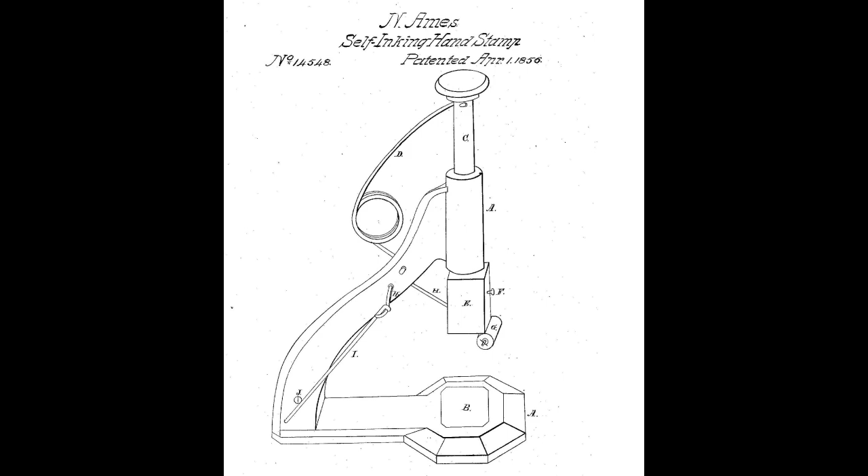First is self-inking stamps. In the 1850s these were first made, but they were large desktop machines, a bit like large perforators. They had a base and a large lever or plunger, and you'd have to pull a lever to stamp the paper. The reason for this is that the ink that was used was not very good, and it had to be rolled onto the typing surface.

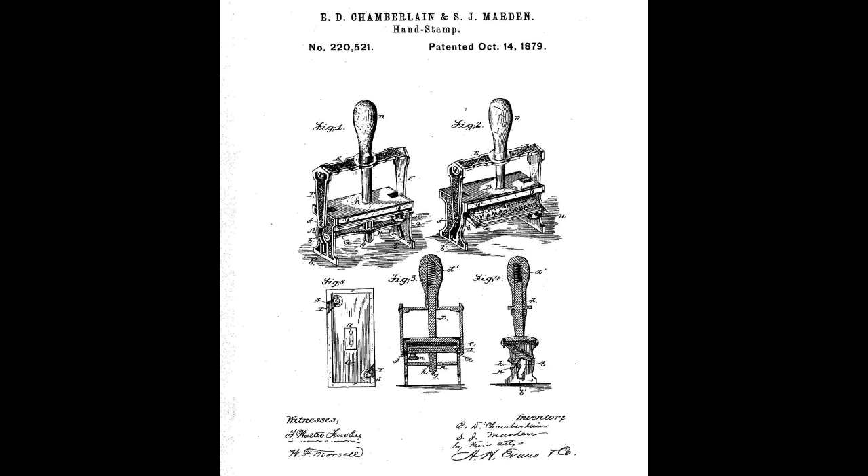Once ink was developed further and more quick drying, they could use small stamping cushions inside the machine itself. That happened in the 1870s roughly.

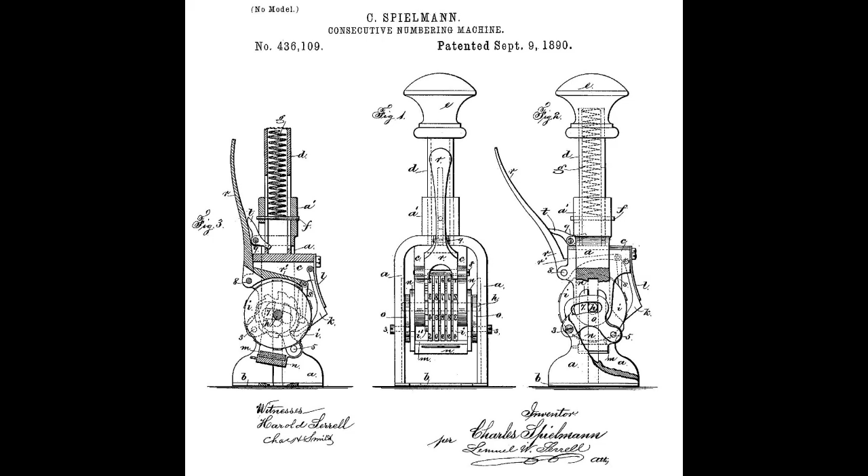The second major innovation is to have number wheels that you can set yourself so that you can print any number. These would then come with a mechanism to easily increase that number, and it was usually by means of a lever that you'd have to pull when you wanted to increase it.

Lastly came the invention of a mechanism to automatically increase the number once you press the stamp down, and also the mechanism to increase it only once every other time you use it, so that you could repeat the number.

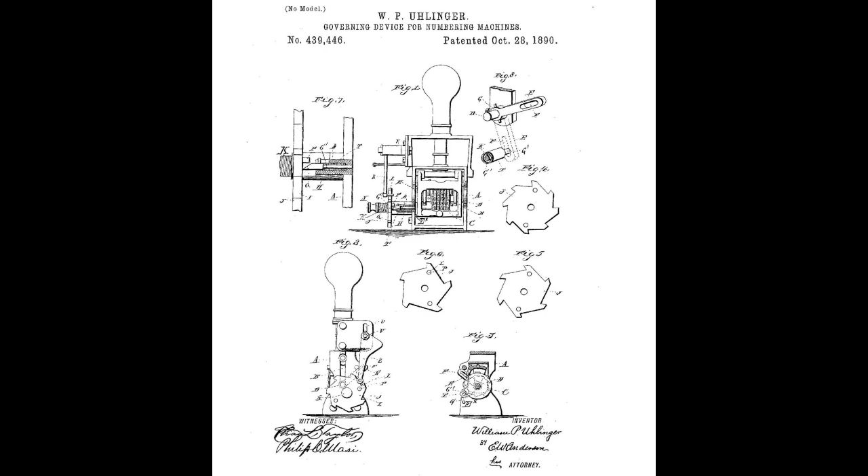This kind of numbering is called Bates numbering, where you have a stamp that prints each number twice before automatically increasing. But you can also set it to increase every third time or fourth time, so that you can do numbers in triplicate or quadruplicate.

It's called Bates numbering because this mechanism was invented by Edwin G. Bates and patented in 1891. The history of the Bates Manufacturing Company is rather complicated, and you can have a look at Chris Stecker's video to have a flavour of that.

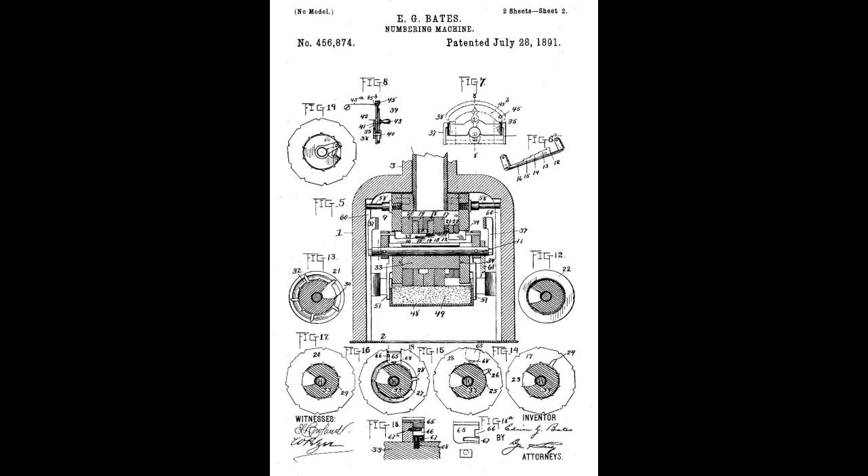This is the Velos Lightning numbering machine. It was made in England and generally sold by Frank Pitchford & Co. during the 1930s. That became Reese Pitchford & Co. in 1937. I think they were sold until the 1940s or 50s even. Velos made perforators, staplers, letter openers, inkstands and lots of other things for the office.

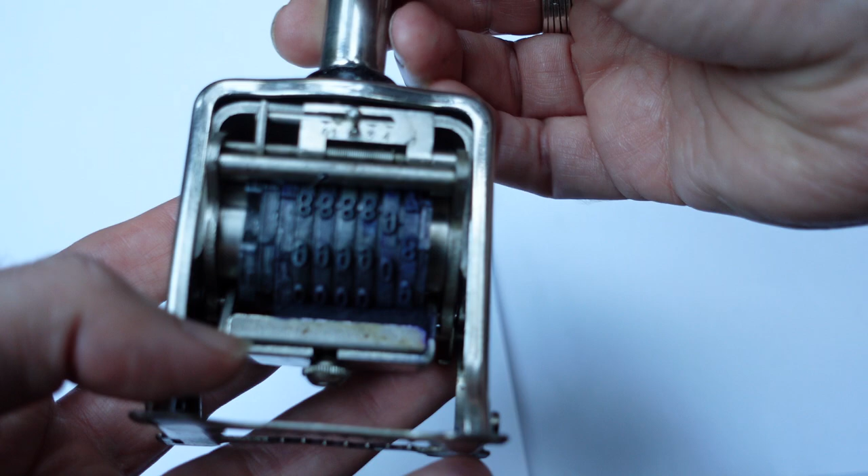The Velos Lightning has 6 number wheels. You can see that here. And these wheels on the other side are for the incrementing mechanism. There's a selection switch here that goes from 0 to 4. 0 means that the number remains constant, 1 that it increases every time, 2 that it increases every second time, and so on.

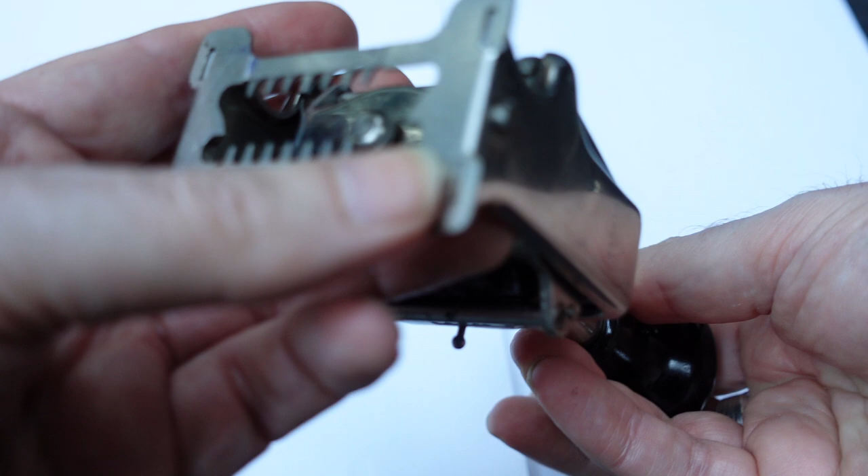At the bottom is this grid so that you can easily see exactly where it's going to print it. It's now set on 2, so it will repeat each number twice. Let's give it a go.

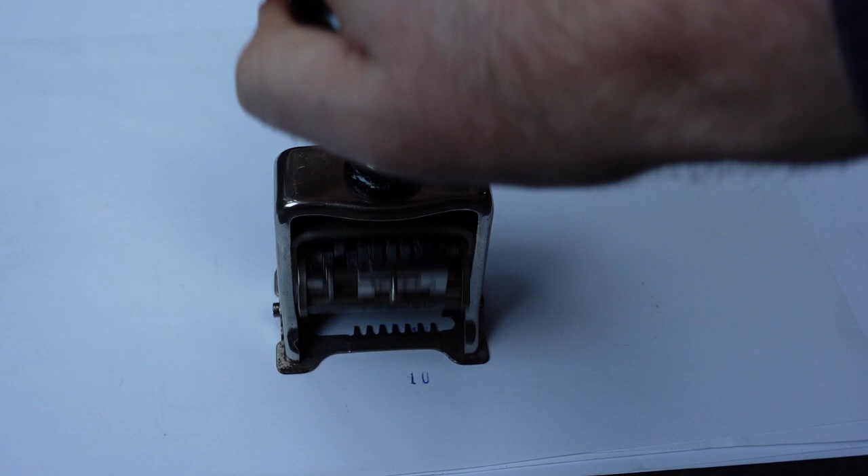The Velos has a ring here that allows you to lock the machine partway through the operation, so that lifts the ink pad from the number wheels so that you can more easily set them to the number you want. And it locks it only a little bit into the operation so that the number isn't increased yet.

You can move the wheels just using a stylus of some kind. I'm using a ballpoint pen, so you can just shift the wheels around.

You may have noticed this one allows for leading blanks, so you don't have to have leading zeros. But once the carry goes over, those numbers are engaged, and then any blanks that happen will be skipped over.

This is the incrementing mechanism. You can set this little knob to any of these numbers. You have to lift it up and then just slide it.

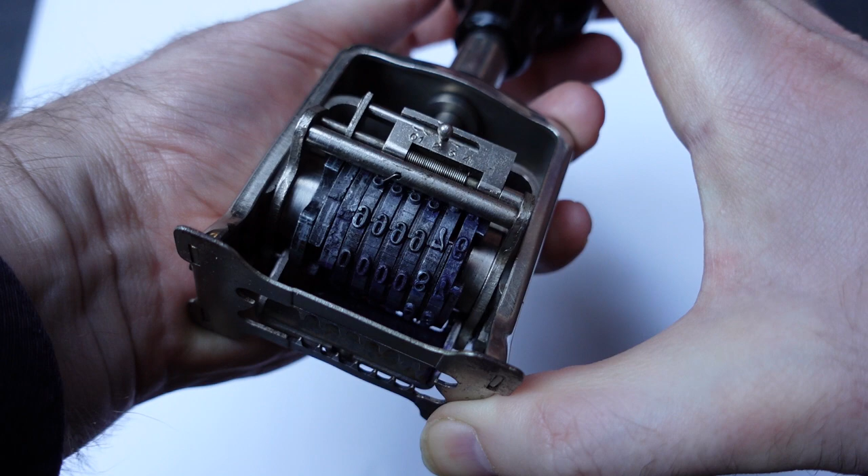This is the Gems numbering machine. It's marked here, and it was made in the Netherlands. I assume Gems stands for the Gems Metaalwerken, which is a metalworks based in Vorden. That company was founded in 1830. It was a coppersmith, Hendrik Emsbroek. That company still exists today.

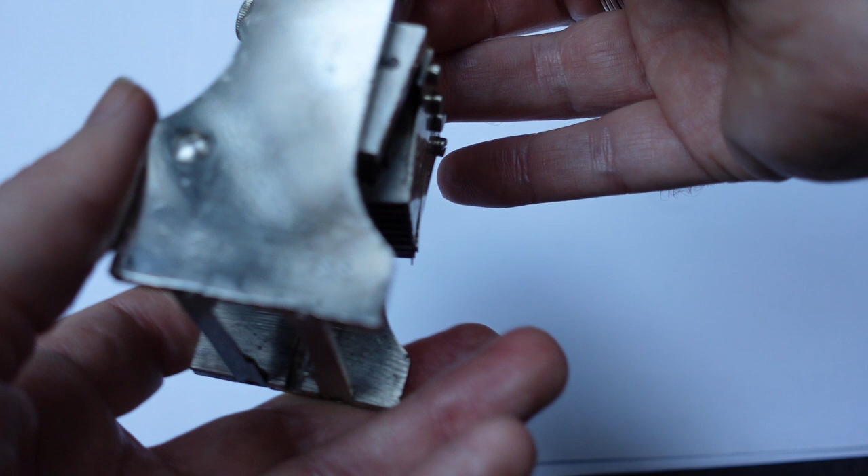This is a much chunkier machine and very heavy. It has a selection switch on this side. It can be set to infinity.

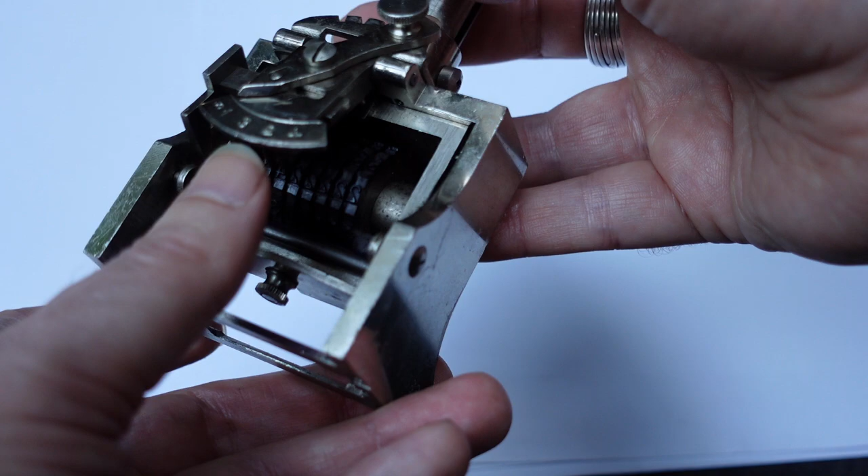There we go, to infinity. And in that case, these teeth are lifted away from the mechanism, so nothing moves.

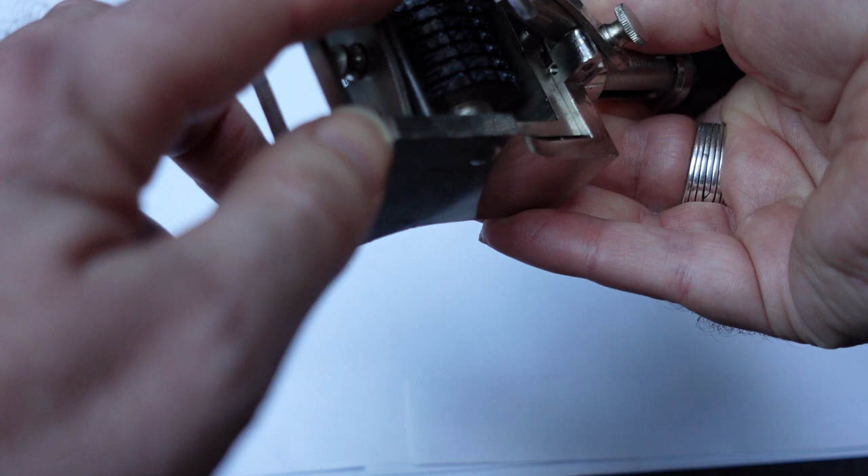Or it can be set to 1, 3, 2 or 4. It's in this order, so that 2 and 4 are next to each other. That makes it possible for only a single wheel to be used for both 2 and 4. That saves you one extra piece.

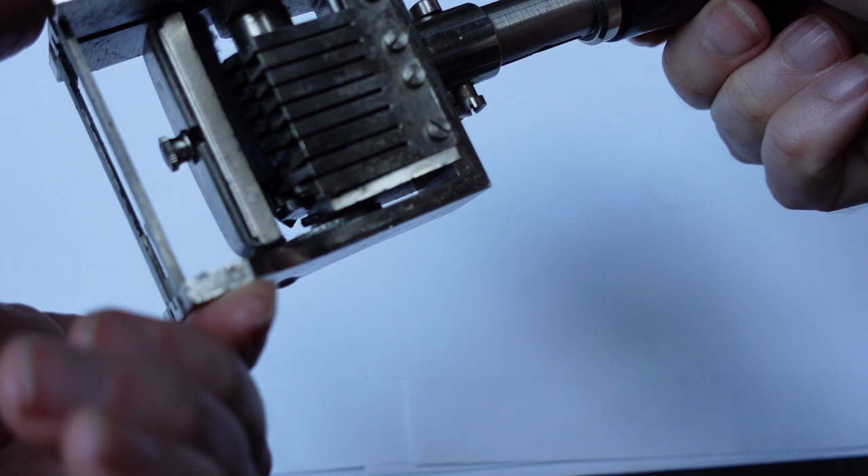It's very easy to change this selector. Okay, so I'll put it on 2 and try it out. Do it the right way around.

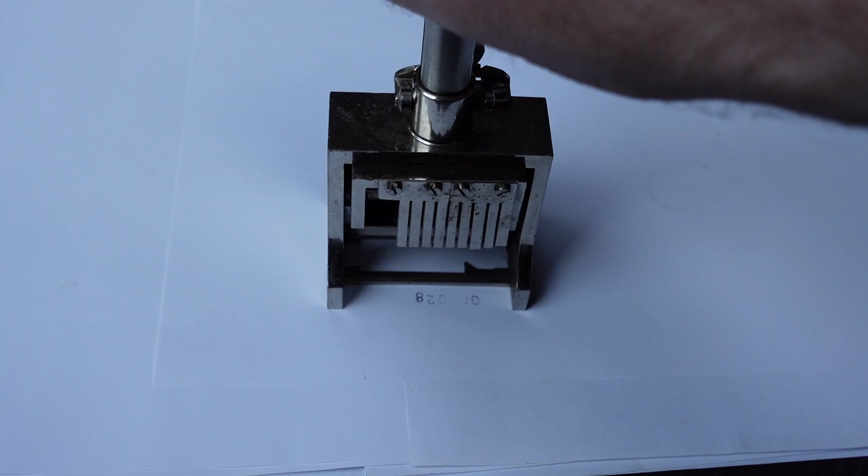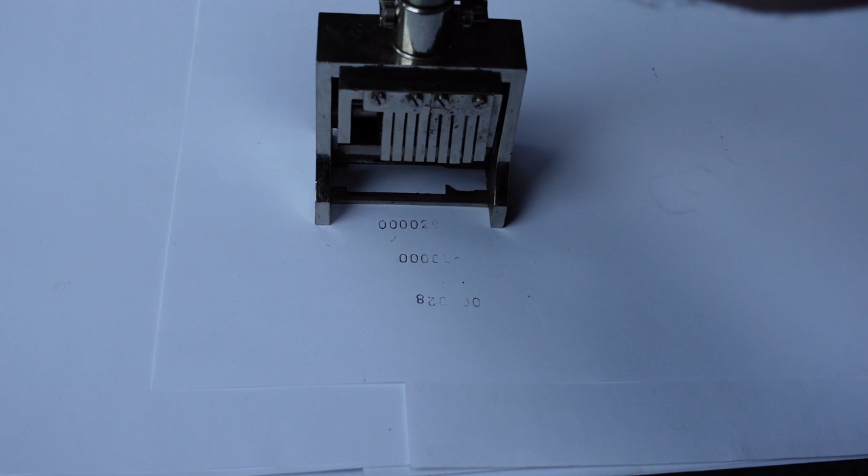It's not inking very well. There we go. So it has 2 29s there. Yeah, and that's a 30.

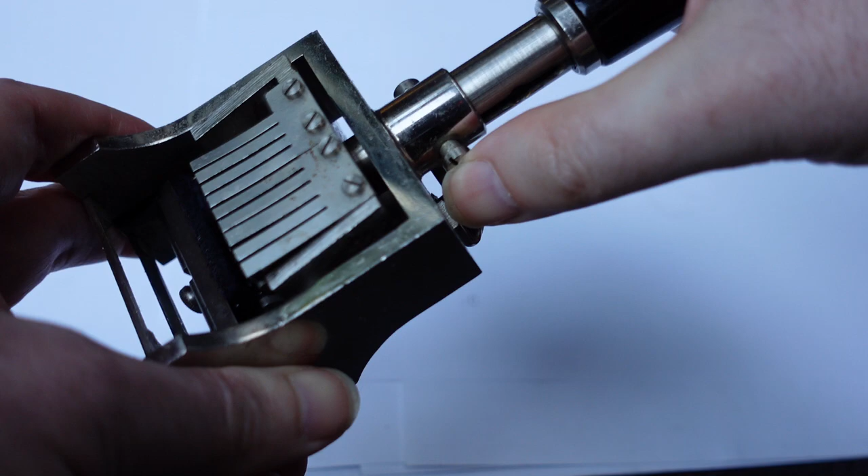It too has a little lock to allow you to lock it in place halfway through. This is where it's lifted the ink pad, and you can now change the numbers yourself.

This machine doesn't have leading blanks, so it always has leading zeros, but it has 7 number wheels. Only the first number wheel does have a blank instead of a 0.

These were 2 automatic numbering machines, the Velos Lightning and the Gems. Thank you for watching.